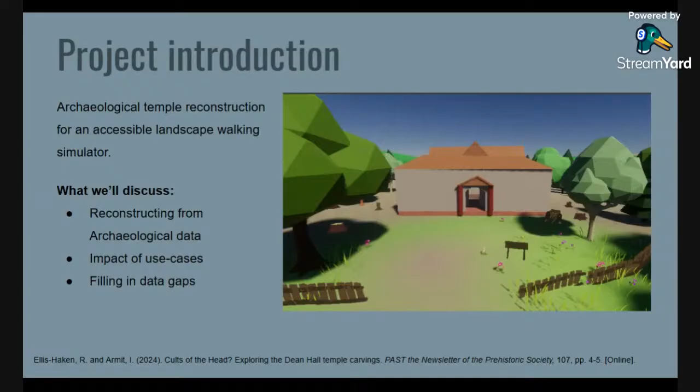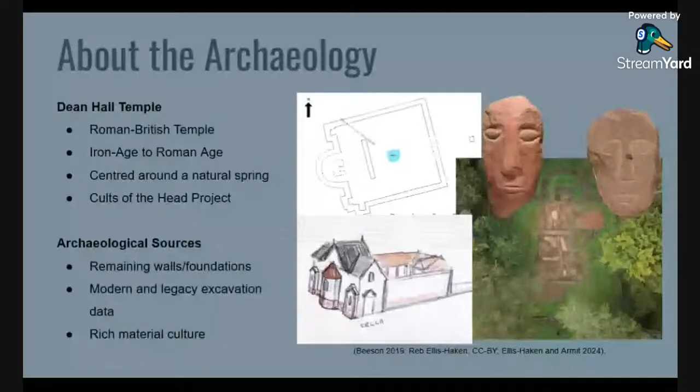Katrine, I'm so sorry to interrupt. It feels like the audio is breaking up a bit, so maybe you could try turning your camera off so the audio comes through better. Is it better now? Is this working a bit more? If you speak, we will. Let's try that. Oh okay, it's breaking up quite a bit now, isn't it? I can hear it being a bit jammy. Hang on, I think it's a little bit better than it was. Is it a bit better than before? Feels 100%. Okay, maybe it was just a patchy spot. I apologize, I'm quite far away from everyone at the moment, so the signal isn't amazing. Is that a bit better now? It's now said my Wi-Fi has gone back to full strength. Yeah, we can hear you. Let's try. Okay.

I'll try. I'll try and speak a little. Hopefully, even if it does crackle, it should be hearable.

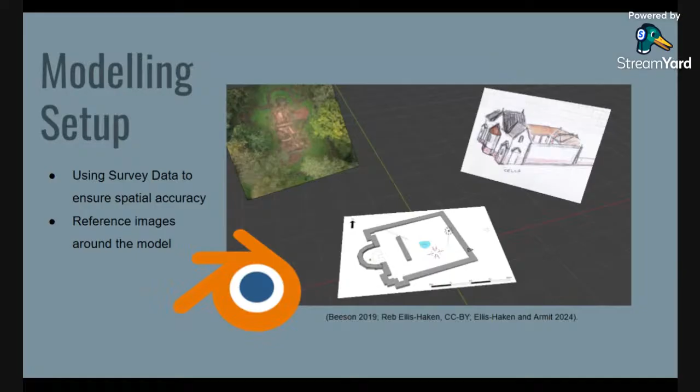Now one of the big things you will often find is that you don't have all the details, particularly when you get higher up on buildings. For example, we had no evidence around roofing for this site.

This meant it was essentially like a blank spot when it comes to 3D modeling. There are several things you can do if this happens during your model.

This is where you get to make creative decisions based on use intentions and users. For example, this model wasn't meant to be used by an archaeological audience, and it was meant to be associated as Roman by the player of the game.

They should know that this was potentially a Roman temple. We deemed that since there was no evidence for either roofing style, the one with the open courtyard was probably more identifiably Roman for the consumer, and therefore that's the one we chose.

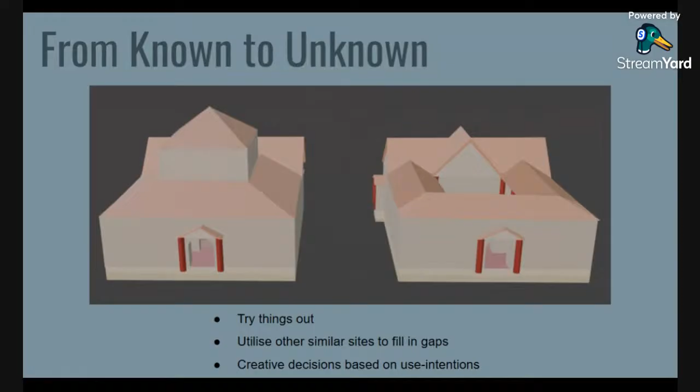One final thing I wanted to point out with this case study, before I pass over to the theory, was the importance of life and lighting.

Really, one of the best things you can do to bring a model to life once you've made it is add in directional light, find where the sun would have been coming from, and position a light either in Blender or in Unity on your model, because this can actually tell you a lot about the usage of the site in terms of which bits get illuminated and which bits are in the dark.

This can tell you how people used to live in a site, how they used to use it. Would they need candles? Would they need lighting? All sorts of things like that can be an incredibly useful asset when you're 3D modeling light, and it's often quite overlooked.

So yeah, that is all I have on my case study, and I'll pass you over to Despoina for the next section, where she will be discussing some of the theory behind 3D modeling.

Hi, thanks Katrine. So yeah, I think after this great introduction by Gabby on what 3D modeling versus 3D imaging is and the possibilities that exist, and also the great practical example on Dean Hall Temple by Katrine...

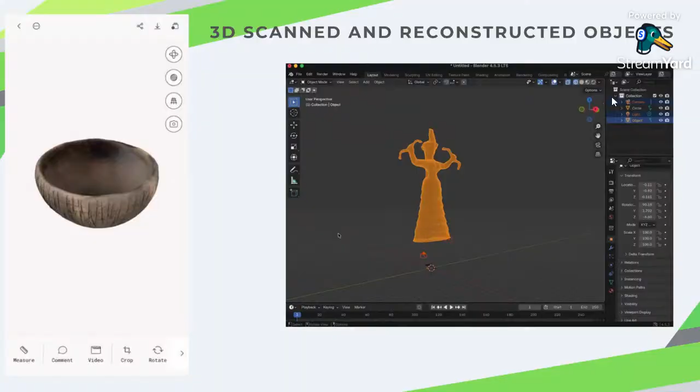I was very much interested in how people handle cultural objects and how they create narratives about them, and I ran different experiments. These are my objects, which I 3D scanned using Polycam, then cleaned in Blender, then inserted into Unity, hosting the project with Ubiq to allow for multiple users to be inside the same room at the same time. And we are using Aria glasses - you can see them down here - which have exactly the same cameras as the Quest Pro that we used for the VR, to capture metrics like gaze, proxemics, object position, head position, and so on.

And I think that's me, actually.

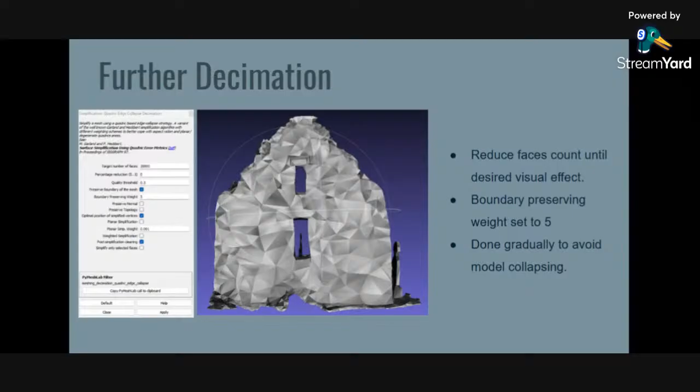Once you get to this point, and you have a model you're happy with, you then need to make sure it is structurally sound. This is done using repair non-manifold edges, which doesn't have any visual impact, but it does greatly improve the integrity of the model itself.

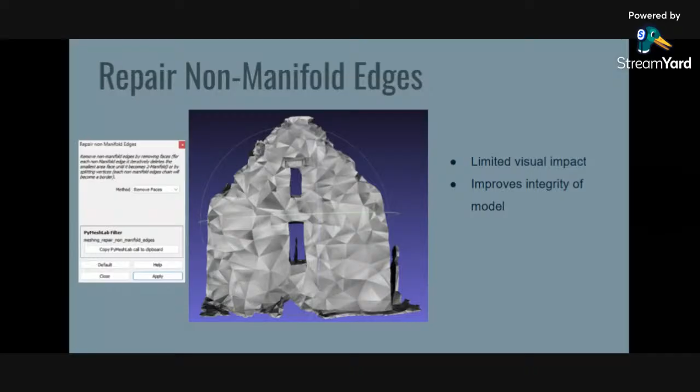Many visualization softwares really dislike it if you have edges that aren't solid - if they're a 2D plane, it doesn't really work in a 3D space. So this simple tool prevents that issue from causing problems for you. Once you have that, you can export your object and pop it into any low poly environment you would like to place it in.

At this point, I want to highlight that this is a piece of research I'm very interested in, because there are multiple ways of doing this. If any of you are interested, it would be great to see you messing about on MeshLab and coming up with your own methods and processes, because it's a very early area of research that hasn't really been touched on.

So what I've shown you is one example, but it's definitely not the be-all and end-all definitive thing to do. I'd really recommend just going into MeshLab, trying it out, and finding your own formulas and approaches, because it would be great to get more ideas on this topic as well. So I'll just go back here for a second.

The model you can see in the photo is about 20,000 faces. If we go back up to the initial one here, I believe it ended up being over 1 million faces. If you think about the size difference in terms of what can run a 1 million face model versus a 20,000 face model, that's where you start getting the benefits from these mesh manipulation tools.

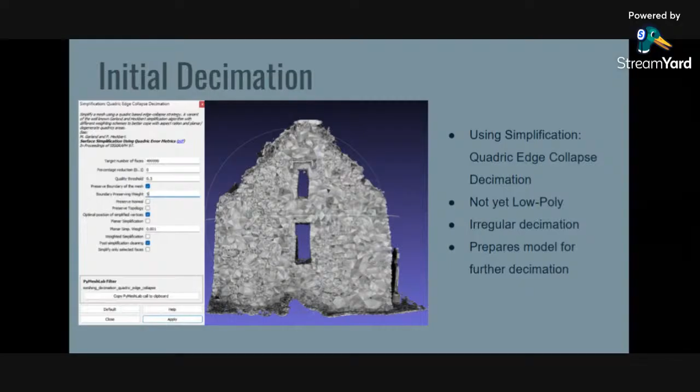So whilst I've talked about how great it is, and how you can really knock down models, there are some pitfalls you need to consider when doing something like this, and things to consider if you decide to experiment with it on your own.

One of the big ones is use intention. As I mentioned earlier, if you're looking at the fine details of a model, you want to keep them, and therefore you need to make sure you're using a manipulation method that will keep those fine details and maybe remove some of the larger details instead.

But if you're looking at potentially the shape of the object and not the fine details, you can do the opposite - you can find something that preserves the shape and completely kills the fine details. Additionally, topology is a very big and important thing to consider.

The concept of topology is far too in-depth for a very short case study, but it's always good to try and make it as clean as possible, just because this makes it a lot easier when it comes to potentially recoloring, retexturing, and machines generally run models a lot more efficiently if the topology itself is clean.

Also, data loss. Doing any kind of manipulation like this, you are inherently going to lose some of the initial data that was recorded. So it's very important when you do this kind of thing that you know what data you're happy to lose and what data you really want to keep, and that you also make a lot of backups during the process.

Because if you do this and you delete the original photogrammetry model, it's not coming back. Therefore you need to make sure that original is stored somewhere, whether that be online, in a repository, or just on your hard drive. Just make sure you have backups of everything you do when you are doing these manipulations.

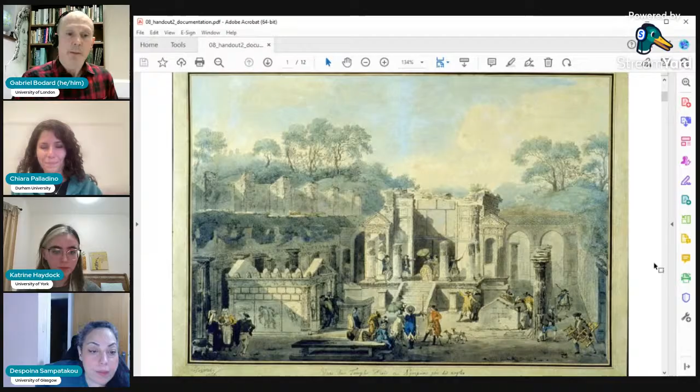So what this contains is a bunch of illustrations. The Temple of Isis in Pompeii is now ruins, even more ruins than it was when it was excavated 200 or 300 years ago. So what evidence do we have for what it used to look like? Well, we've got some drawings that were made much closer to the time of excavation, various different drawings, some plans, some other historical drawings, and some drawings of the interior walls, which have these sort of paintings or frescoes on them.

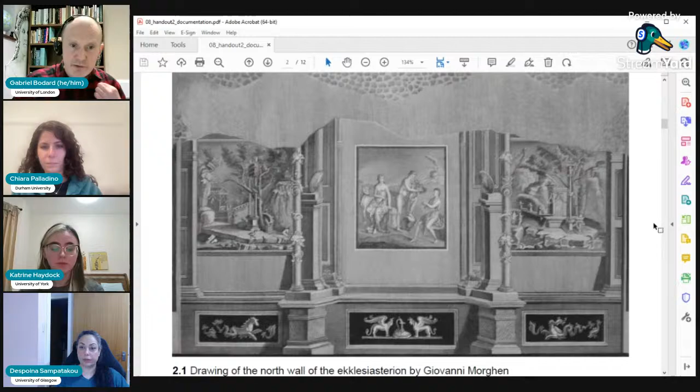The reason these are important is because at some point later, part of that interior wall - you see one of the panels, that's one of the panels from that wall - was removed from the wall quite crudely and taken away to museums. So we can now take photographs of those panels, but they are smaller than the entire wall. We know what the entire wall looked like from a drawing, and we have a photograph, which may be slightly more faithful, but only of the parts that survived. There's several examples of that - more photographs of the bits that were taken out, and drawings of the whole wall to put that into context.

These are all materials which are also provided in the download of textures that you can use to cover the walls of the model as you build it. So I'll scroll down past a few more of these.

There are then the photographs that Valeria took when she was on her expedition in Pompeii herself, and these show what the remains look like now, or at least as they did in 2007 when these photographs were taken. In fact, these photographs I don't think she did take herself - these may be coming from somewhere else.

But we've got these photographs. You can see when you start to see the model as you build it, you'll start to recognize this wall with the 5 doorways in it. Various other views of that - again, other views of the doorways, close-ups of some of those doorways, so you can see what's there.

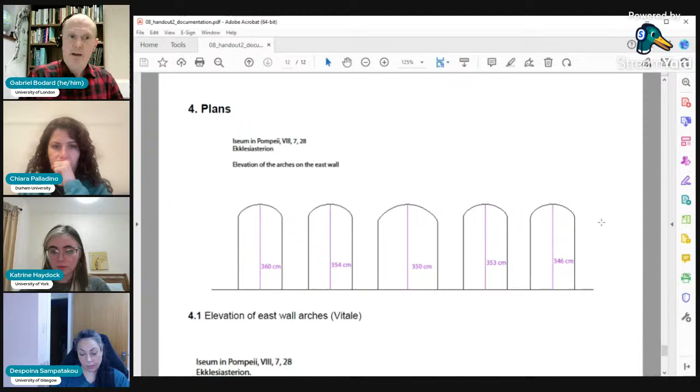Here are some plans, measurements taken by Valeria herself. While in Pompeii, she used a laser measure to measure the heights of those doorways, and you see they're all slightly different heights. When we design the doors in the 3D model, we'll make them all the same height, on the assumption that variation in heights would have been concealed by slightly different thicknesses of plaster, or the heights were so close it wasn't detectable by people without laser finders.

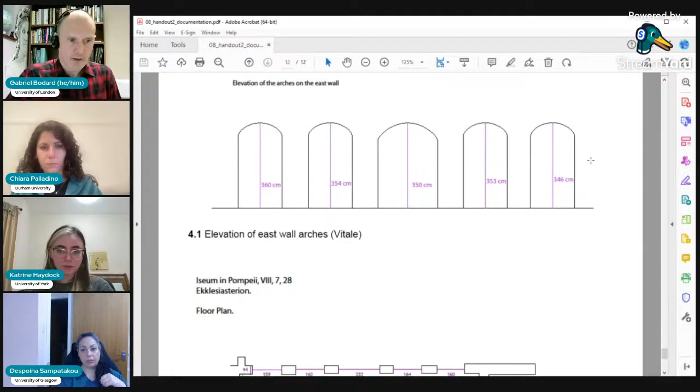But that's something we have to decide when we design the model. Are we going to use these dimensions, or a slightly more even dimension we've chosen? Likewise for the floor plan, the middle doorway is quite a lot larger, while the others are all within a couple of centimeters of 160.

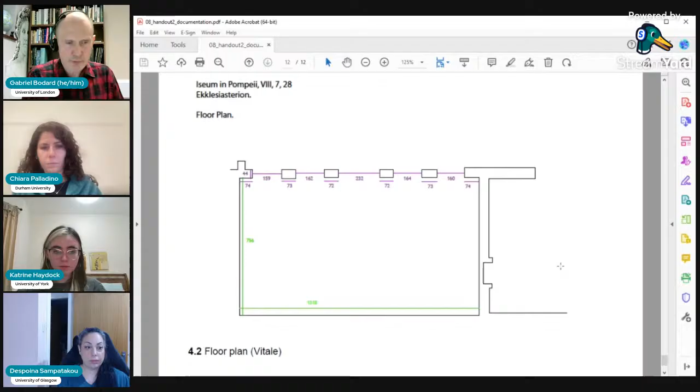Probably they were all intended to be 160, and with plaster around them that difference was lesser. We've got dimensions of the whole room and so forth. These are the decisions made by the designer of this model. We're building the model as a tutorial, but the designer was Valeria Vitale, and this is documentation of how she came up with that design—for you to consider when building the model. Follow her instructions and use the materials she's given, but also refer back to this and try to figure out why she made the decisions she had.

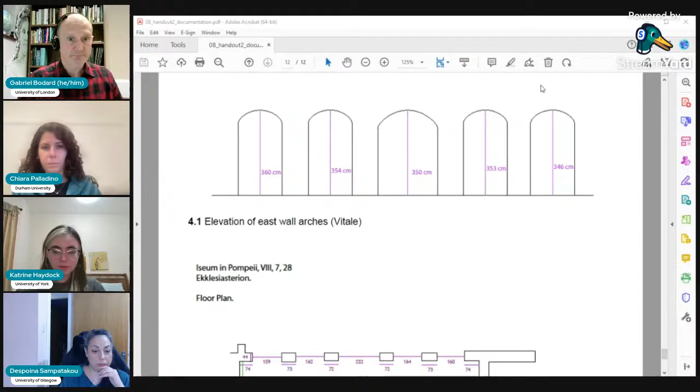Obviously, from those photographs, the walls—as in some examples Despoina and Katrine have shown us—don't go all the way up to the roof. So anything above that height we're reconstructing from our knowledge of what Roman roofs look like, or guesswork, or other nearby examples, or some stones found on the ground. Some we may just have to go back to Vitruvius and say this is what he said a roof should look like. Some we may just be using our imagination.

All of those things should be documented: how did I make this decision, what did I decide, what did I come up with? This is the beginnings of that sort of documentation you want to use if you go further than following the tutorial and decide to create your own model. This should be a model for that kind of work.